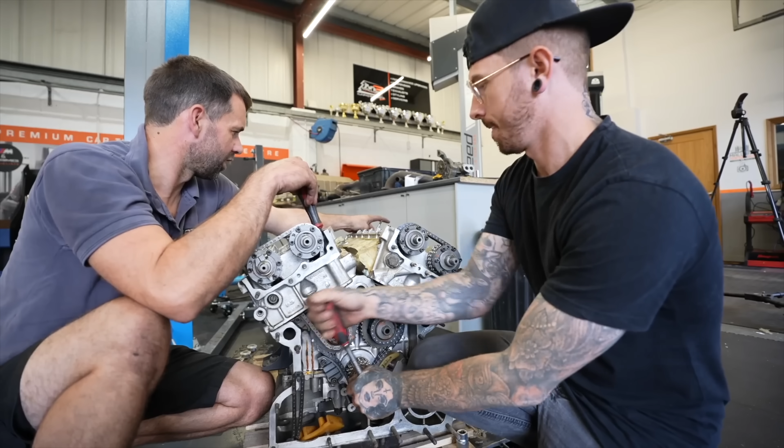£100,000 on this Lamborghini Murcielago, which was left abandoned for over 7 years. We've discovered along the way that the engine was rebuilt poorly - the bolts were literally finger tight. It was also hiding some painful bodywork underneath the wrap, and a bunch of other questionable repairs - there's literally holes here. But this is my absolute dream car, and whether it makes sense or not, I'm determined to rebuild this Lamborghini.

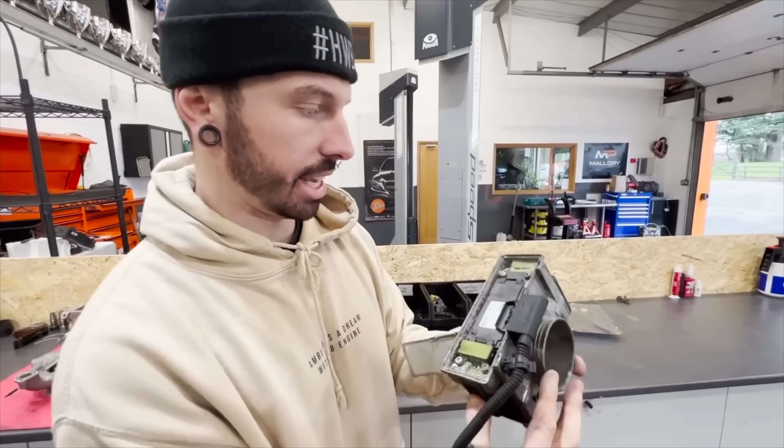And the fact my dad is helping me along the way makes this build that much more special.

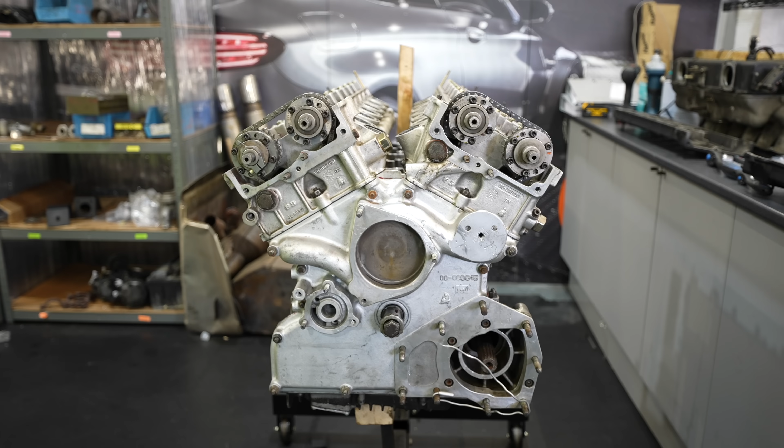But we're gonna need some help from Lamborghini, which is why I've come in today. Lamborghini actually agreed to our little deal, and what's in this box could save me thousands.

But for now, we've got an engine to deal with. Now that we timed up the engine in the last video, the computers of the car need to know that the engine's timed up, so they know when to inject fuel and when to ignite it. The way it does that is through a cam position sensor, and this pointer thing is what communicates with the cam position sensors, which are sat here.

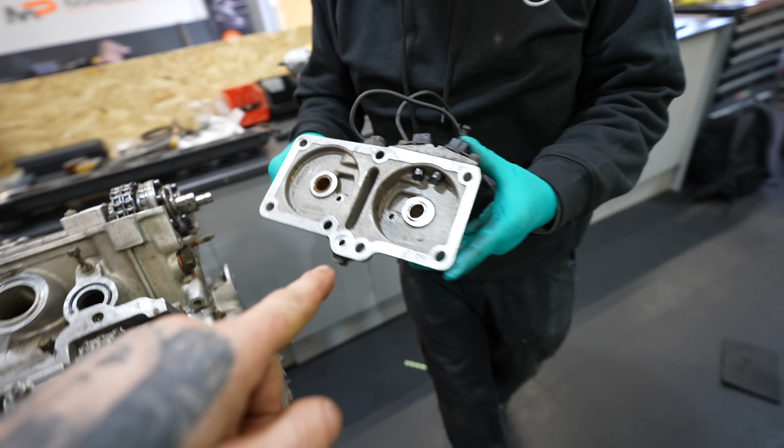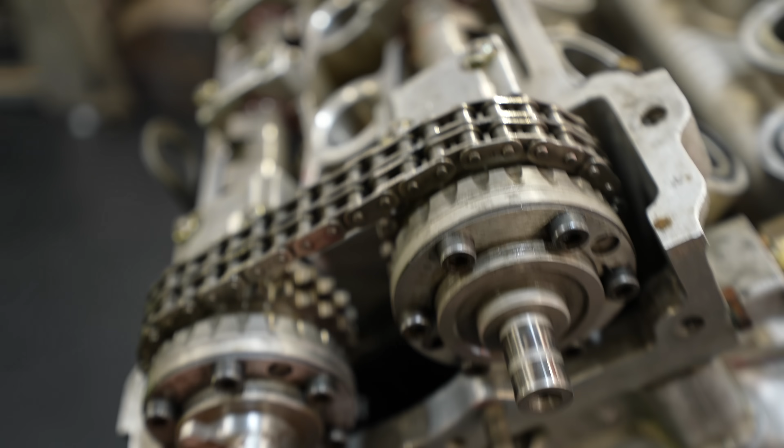According to the Murcielago repair manual, the pointer on the end of the cam needs to be pointing to that cam sensor when piston number 1 is 30 degrees before top dead center. So we're turning over the engine now to get it bang on 30 degrees before, then I can adjust that pointer into place and slide on the cam position sensor and see if it lines up. And it was, so that means we can tighten it all down.

Everything is all timed up, ready to go. All we need to do now is literally start bolting the whole thing together, and then we can figure out whether what we've done is actually right.

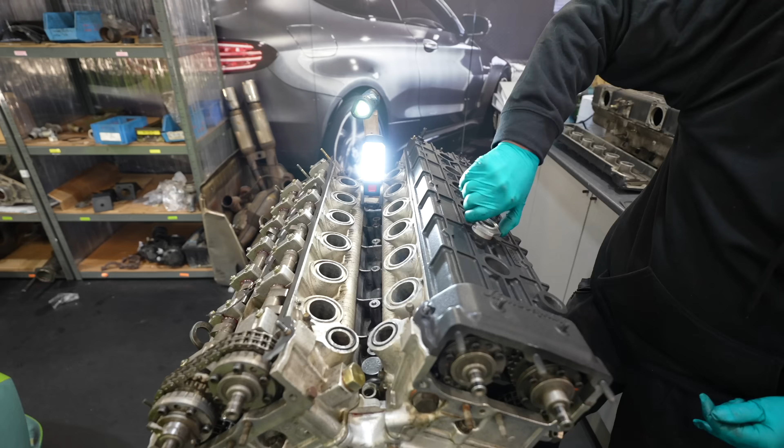We are actually sealing up the engine now. On go the rocker covers, both left hand and right hand side, along with the gaskets and the gaskets for the cam sensors as well.

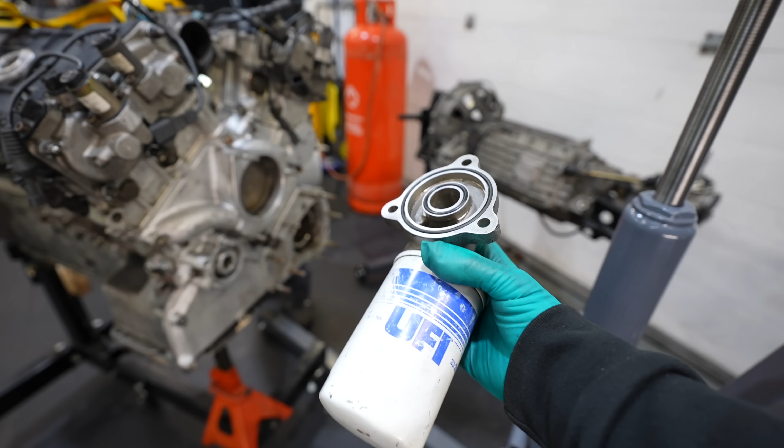And what I have in my hand now are some knock sensors. They bolt to the lower block of the engine and then send a signal to the ECU if any of the cylinders are knocking. So I've got to make sure I get these in the right place. Then I've got the oil filter and the oil filter housing to bolt onto it. Yes, I'm going to need a new oil filter, but we'll get to that.

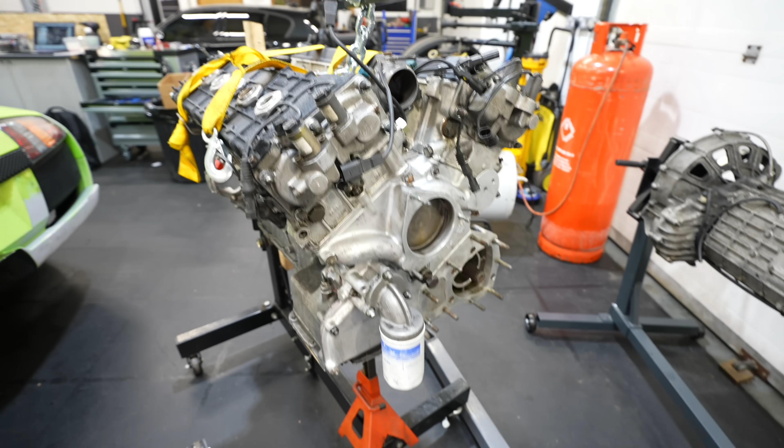And with that all on, we can finally take the engine off the engine stand and hang it with the engine hoist. Now we can access the main seal of the engine and replace that. And somewhere amongst the boxes of bits, I found a starter motor that we can bolt to the engine as well.

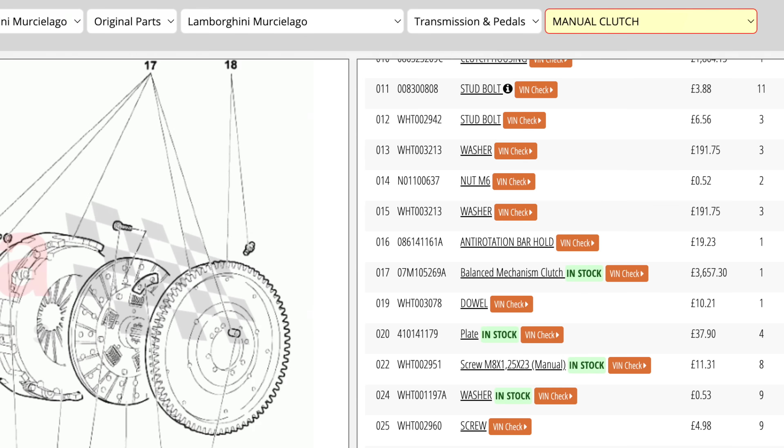Now, when we bought the car, it didn't come with a flywheel, but I've managed to get a reconditioned flywheel and Kevlar clutch all balanced up from a company called Reeve Knight. I think I'm pronouncing that right. £2,000 for the clutch flywheel, and it's an uprated one as well. And it came with all the bolts, so absolute legend.

This should go on like this. So this flywheel is actually brand new secondhand. It's been resurfaced, so it should be as good as new.

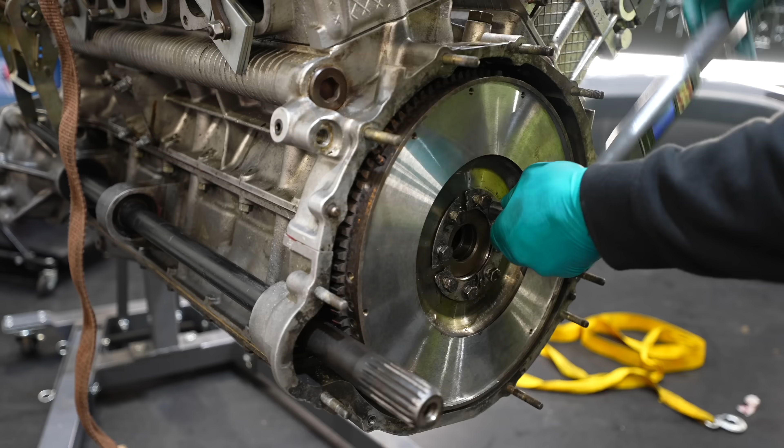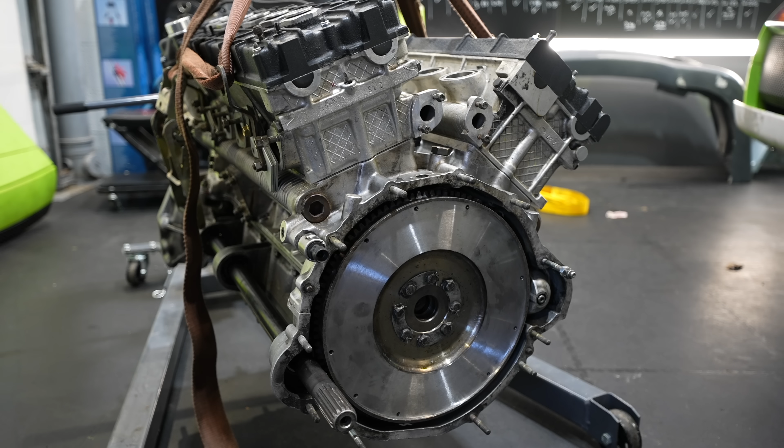There's some special plates which go on before the bolts, and then I've got to torque the bolts up in the procedure that it says in the manual. And once the bolts are torqued up, you're actually meant to knock over the plate which sits behind the bolts, which kind of clamps the bolt down and stops it from coming loose. But I can't imagine how well that works. And there it is. And there's one final thing we're missing.

We've got a new bearing from the bearing shop. My dad went to the bearing shop, £5 for a new bearing. Although from Lamborghini it was £15, so we saved a tenner at least. Oh, one fresh new bearing and the circlip installed. Oh, it's like going to the jewellers.

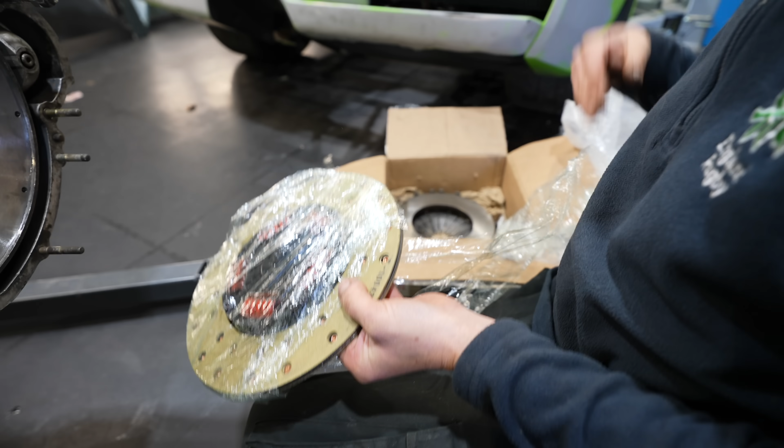£2,000 worth of clutch. Isn't it? It's good for 10 miles.

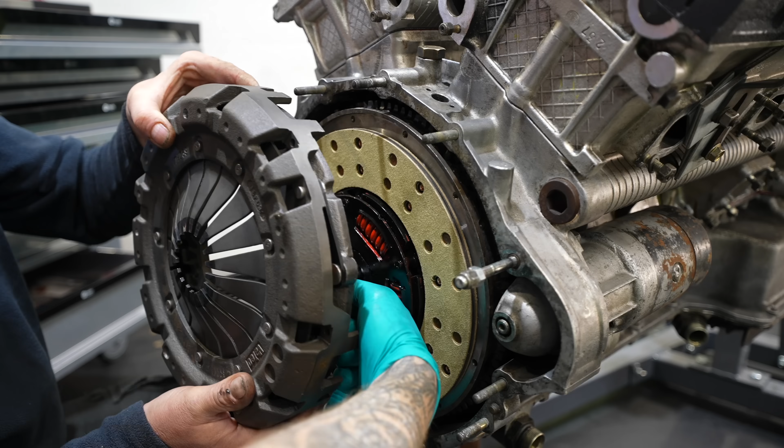This has all been balanced, so we are making sure now that the pressure plate lines up to the flywheel like that, so then we're not going to get any wobbles. Now you're actually supposed to use a special clutch alignment tool to make sure that the clutch sits perfectly in the center of the flywheel. But as we didn't have one, we managed to make one with an extension and a socket, as I'm sure a lot of you guys who have changed clutches before at home do the same thing.

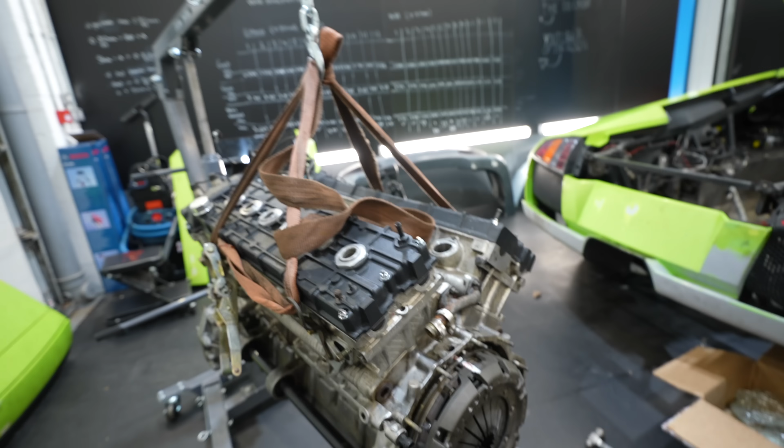Clutch and pressure plate is on, lined up, we think, and excitingly, the next step. The next step is we're going to take the manual gearbox off the stand, which actually we found out in a previous episode was an automatic gearbox, which is converted to a manual because it has an extra hole here, which we're going to have to fill up with something. And we're going to bolt it to it, and we will have like a complete engine and gearbox, which is pretty exciting. Yeah, I filled it up.

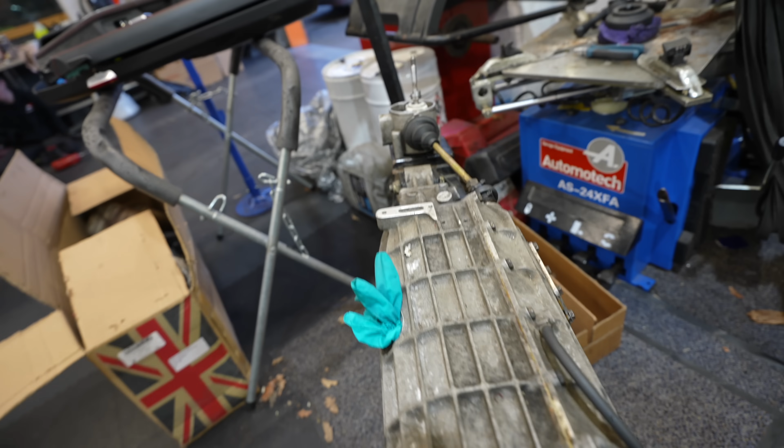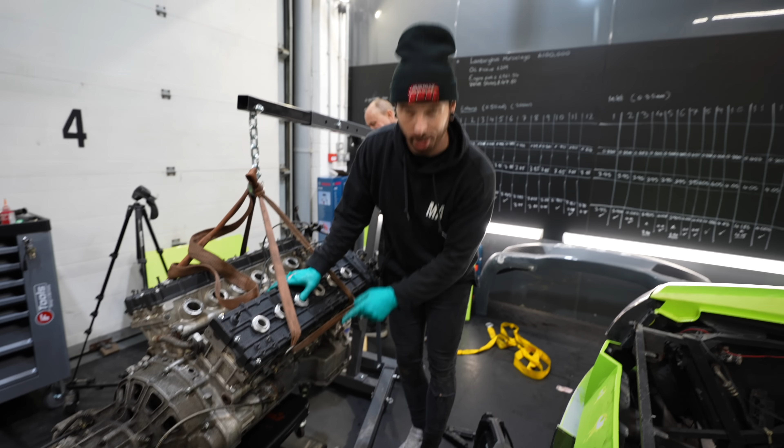Another monumental moment now. The gearbox being bolted to the engine of the car. Now that we've slid it into place, all we've got to do is tighten up all the bell housing bolts. And there was one thing I was dying to find out. One thing that we don't know, now this is all together, is whether the starter motor even works. And anything on this car looks like we've got to take the engine out to change. So I want to be 100% sure that starter motor works.

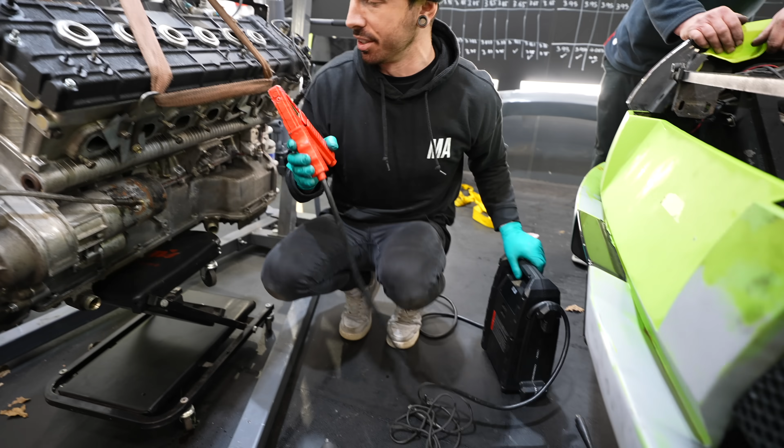So we've got a jumper pack and a load of other goodies, which we're going to put onto the starter motor, and then we're going to ground it out over here. This is a little switch. One of these is going to go on the positive, negative for the switch. Turn this on. It's in neutral. It's not going to try and drive. Okay, now this should turn the whole engine over. You've not got an earth on it. No. Right, yeah, that's right.

That's good. Hey! It's okay, we've got assembly lube in it, so the starter motor does work, if you can listen. Too much rock. At least the starter motor works though, and the engine does turn over. There's no valves hitting pistons though, is there? No. So we're good. And that worked. Science. Things are looking good and we're making some really good progress already.

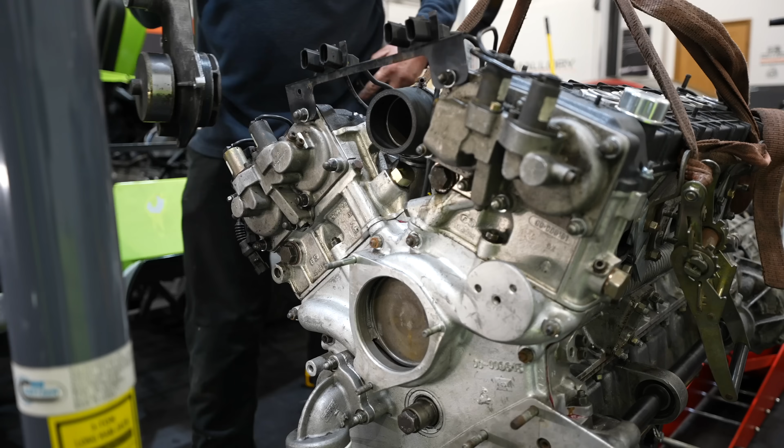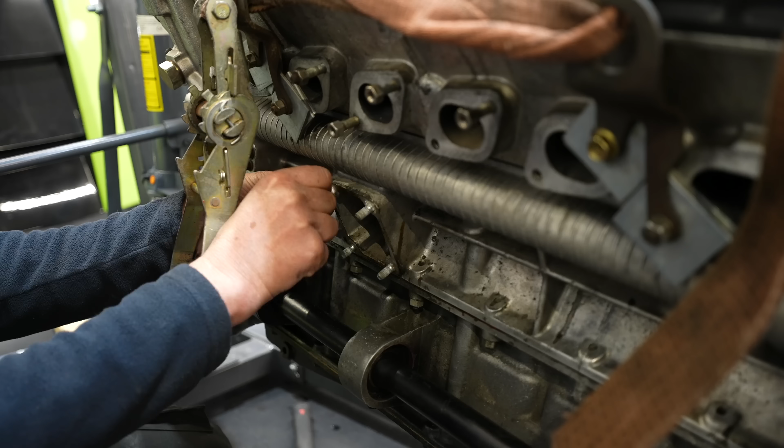Now it's time to start bolting on all the ancillaries of the car, like the water pump and the thermostat housing, which I'm doing now, and then both the engine mounts, left hand and right hand side of the car. And I'd say we're doing pretty well for people that have never built a Lamborghini engine before. This huge clump of metal here is the power steering pump and the aircon compressor as well. Yes, a 2002 Lamborghini does have aircon. And then one final tensioner which bolts on here.

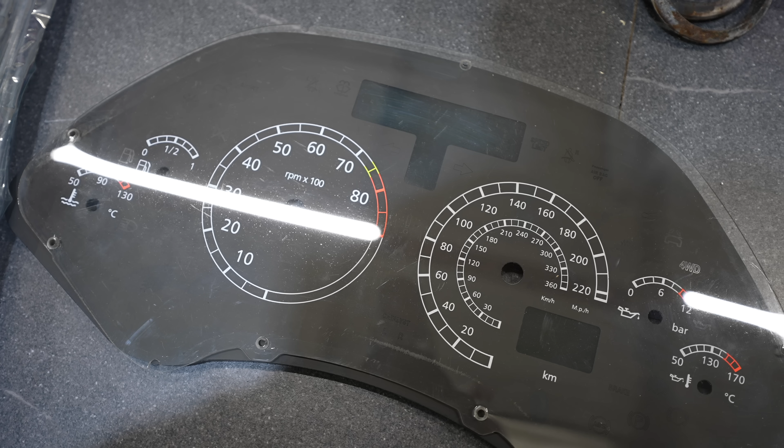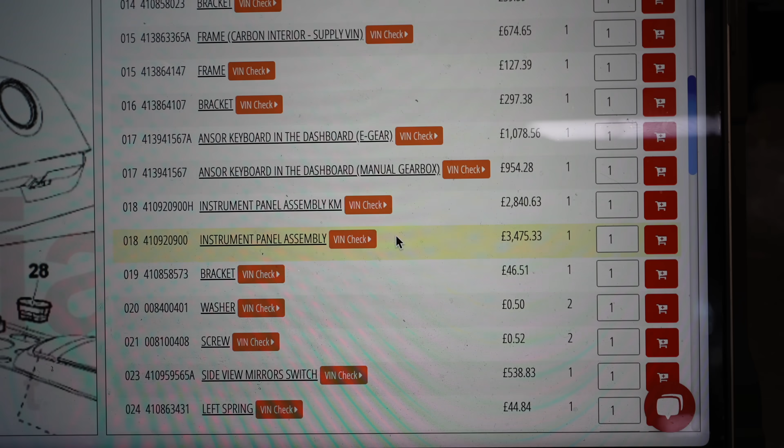Now let me tell you about this deal that we made with Lamborghini at the start of the video. Ever since I picked up the car, the instrument cluster hasn't worked. And apparently that's because the previous owners managed to jump the car the wrong way. Now, a brand new instrument cluster from Lamborghini would cost me over £3,400, including tax. So I really wanted to avoid buying one. Also, you may remember we ordered a brand new oil pump from Lamborghini because we weren't confident in the way that the old one had been rebuilt. But after ordering it, the wait got longer and longer. And in the end, we ended up rebuilding the one that we had.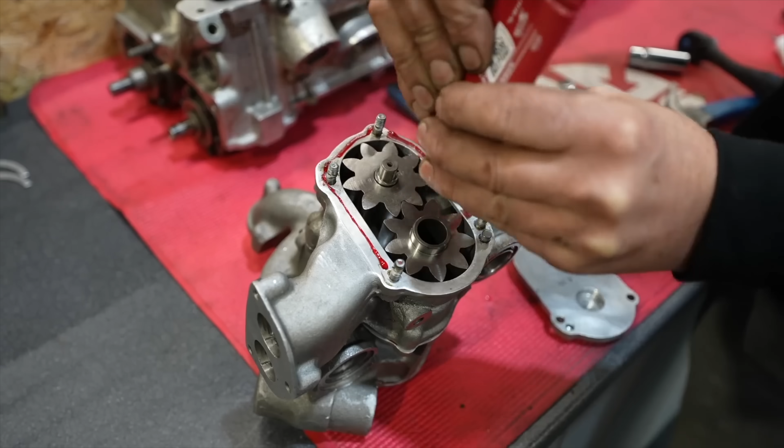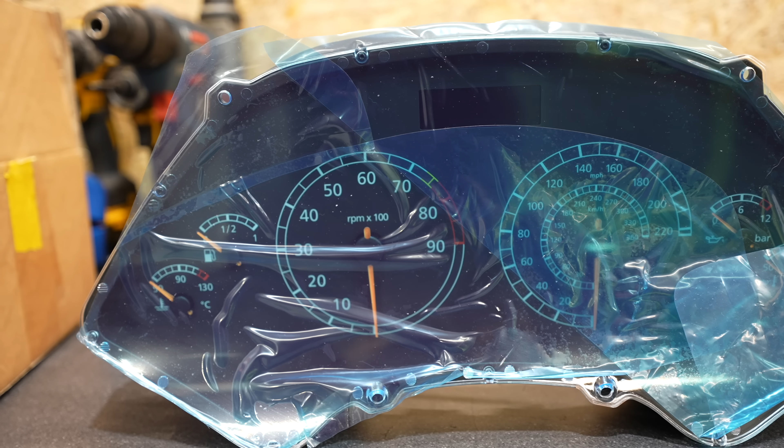So I had a deal proposal with Lamborghini to cancel my oil pump order and transfer the money that I used to pay for that onto a new instrument cluster. Now normally they wouldn't accept this because it's a special order part, but on this occasion they did. And inside this box, finally, we have a brand new instrument cluster, after all the hassle we've had with the old one. But unfortunately, it's not as simple as that.

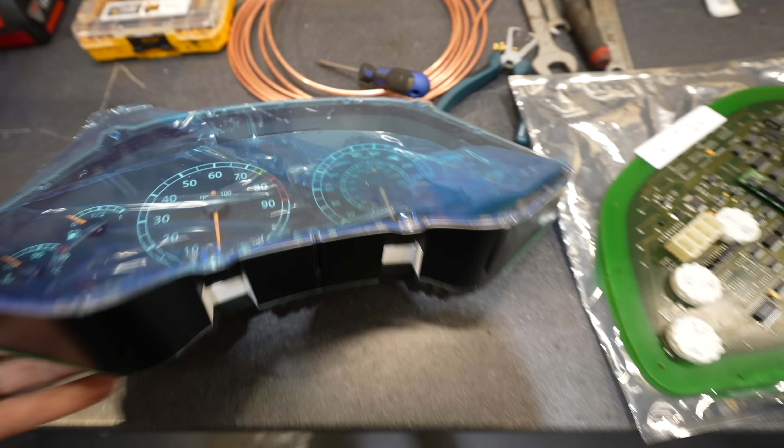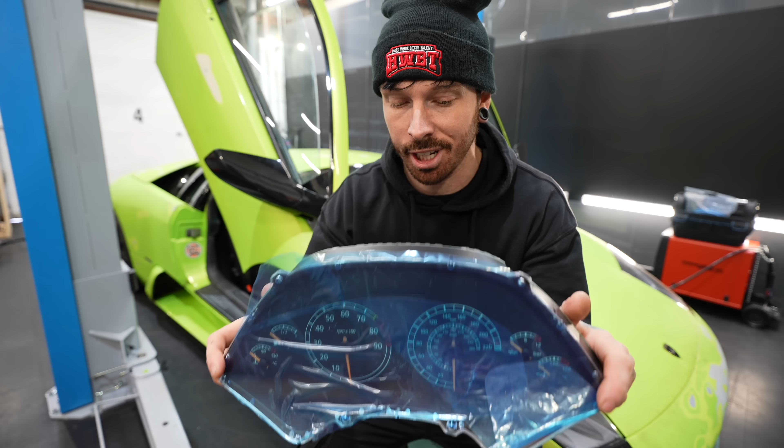As soon as I got back, I unboxed this instrument cluster to find that on the back, the plug, the connector in here is completely different to the plug and connector that is on my instrument cluster. Now I've double and triple checked the wiring behind my dashboard to see if anybody has messed with the plugs or changed the connector to a different one, but it all looks legit. These connectors at the bottom here look almost too good to be anything else but Lamborghini, and this plug is definitely all original. And Lamborghini were 100% positive that they've sent me the right cluster. They matched it off my VIN number. So what the hell was going on? Well, I then found out this.

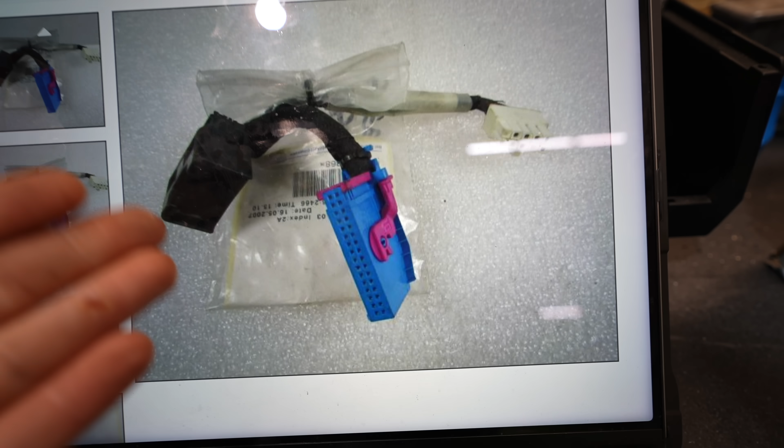If you check these clocks out, they read in miles per hour, but my old clocks actually read in kilometers per hour. It turns out all 2002 Lamborghini Murcielagos were only made with clocks reading in kilometers per hour, and all models after 2002 came with a completely different wiring harness behind the dashboard. The instrument cluster with the plug I need is discontinued. So if you had a 2002 Murcielago and wanted your cluster to read in miles per hour, you'd have to buy this wiring harness, which converts it from that plug into the blue plug on the back of all the instrument clusters from now on.

Let me show you how much they want for that instrument cluster: £1,666.40 plus VAT. So if I want this instrument cluster to work, I'm in well over, what, like £6,000. So I still don't know what to do - we've got to get the old ones working.

On top of that, when we finally get the instrument cluster working, we still have no idea what the mileage of this car would be. The only way I can roughly find out is by checking it using carVertical. This is the report I've got for the Lamborghini Murcielago. Everything looks good throughout, and when you get to the mileage graph, the last recorded mileage was around 78,000 miles in 2009. So I'd say we're expecting around 80,000 miles, fingers crossed.

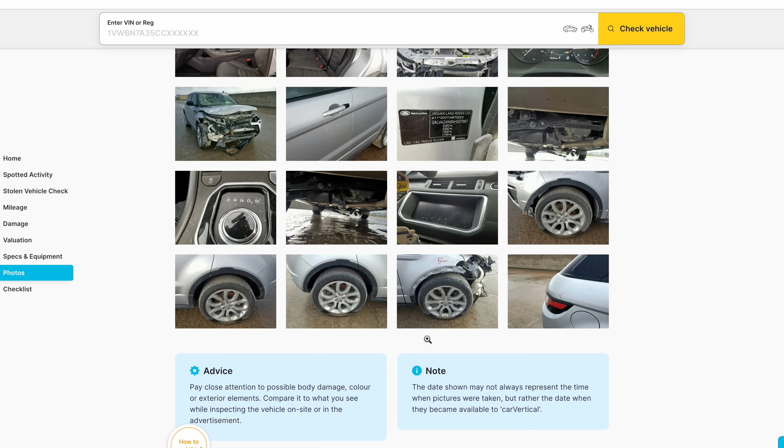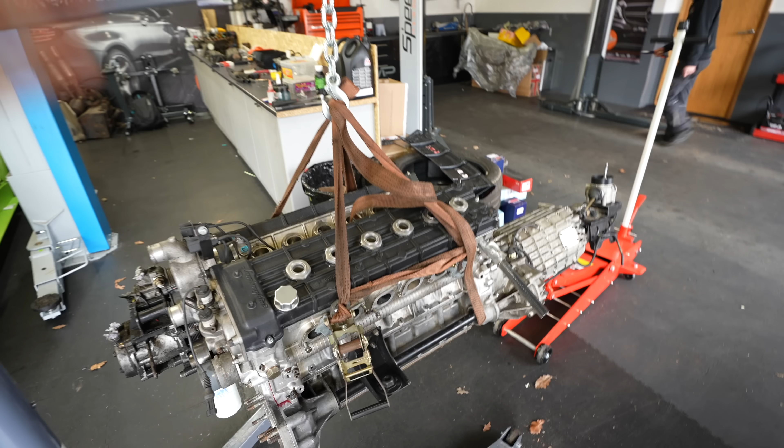The engine and the gearbox are absolutely huge, and all of this has got to go in as is, because it's so difficult to work around. Even though it's a huge engine bay, once it's in, I'm sure it's going to be completely tight and compact. We've got to get the exhaust manifold on before we put the engine in, because the side of the engine wall is going to be so difficult to slide anything onto once the engine is in.

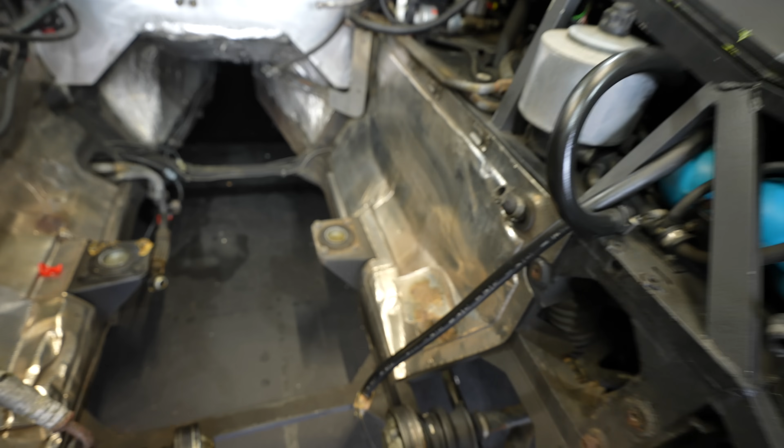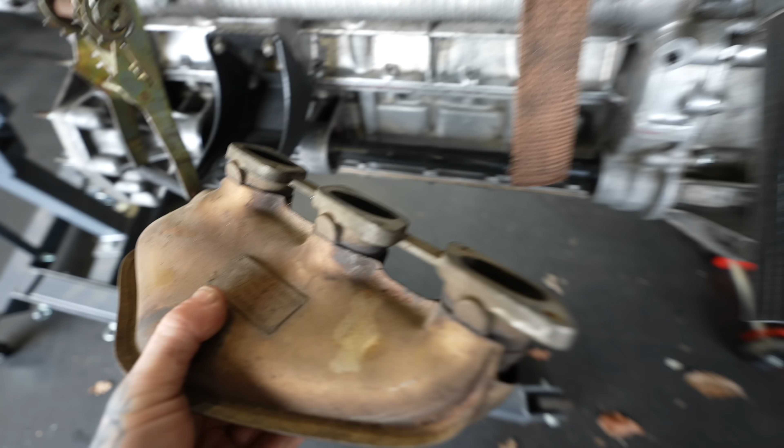The exhaust manifold - well, one of them is over here, and this one's going to go on the other side. But between the exhaust manifold and the block of the engine, there are 12 of these gaskets, one for each cylinder, and we only have one.

I've just called Lamborghini - they want £333 for 12 of these gaskets, and they're just little metal materials. They can get them tomorrow, but we want to put the engine in today. So the only solution we have is to send Fabian to an exhaust place to get a bit of sheet metal, which we should be able to make these exhaust gaskets from. Easy. Go, Fabian.

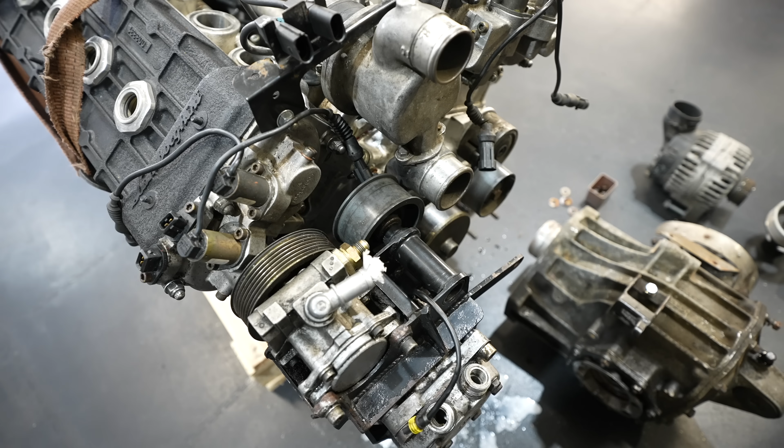Whilst we wait for Fabian to collect and deliver the goods, we've got plenty more we can carry on with. One of them being the rear diff - this attaches directly to the engine, and we're pretty sure we should bolt this on before we put it in the car. After that, to drive all the ancillaries, we're going to need an ancillary belt.

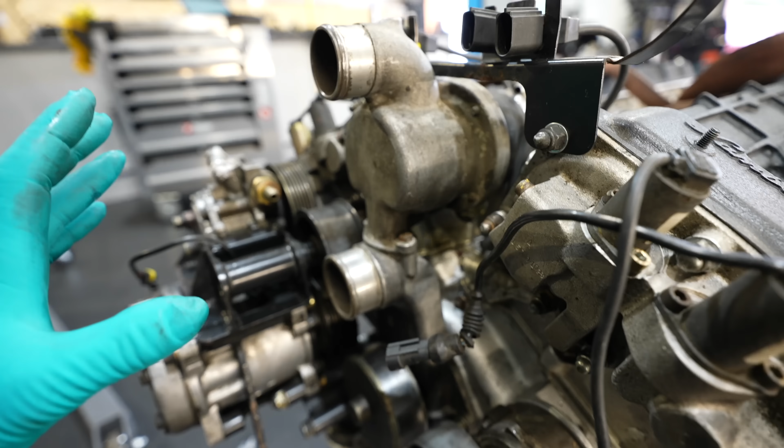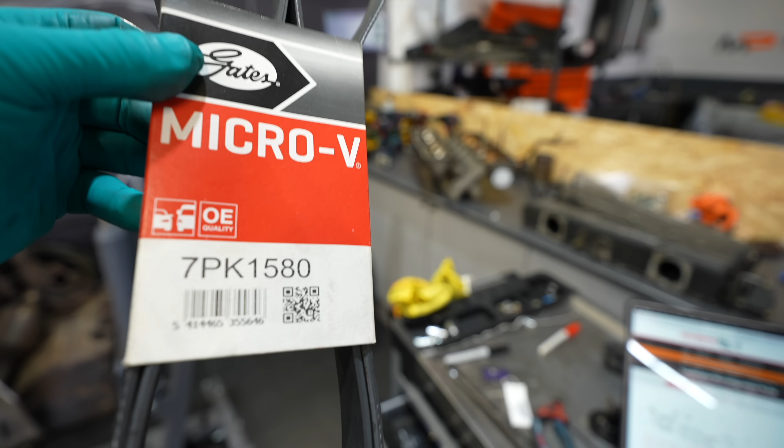Lamborghini want £90 and 8 pence plus VAT for an auxiliary belt. And you can already guess we found one for a lot cheaper on eBay - £13.49. We just gotta hope it works.

And the belt fits snug - come on. And quite positively, it did. It was pretty easy to cross-reference the auxiliary belts - we just needed to find out the length of the original belt and how many ribs it had in it. Once we put the alternator on and tightened the tensioner up, the belt was on and the engine was just about ready.

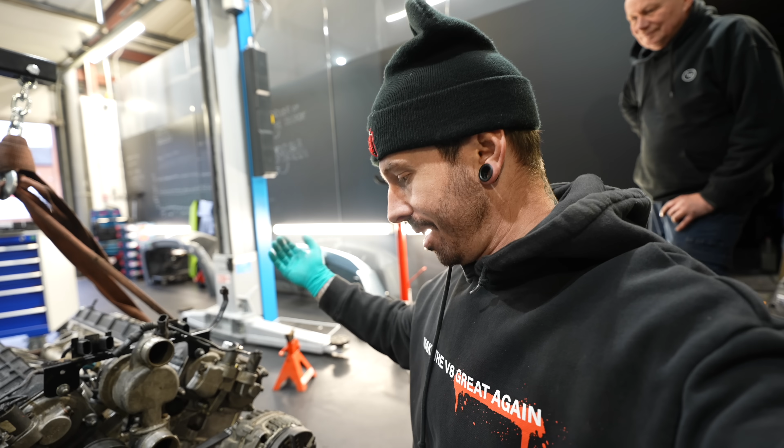Right, now everything is all on, and we've got some decision to make. My dad reckons that it would probably go in the engine bay a lot better without the inlet manifold on, but I think it's going to be easier to get it on now. Well, we'll see. I think let's put the inlet manifold on, and then I think we're just about ready to go, bar the exhaust manifold gaskets.

And this was the inlet manifold. This is what's came off, and quite clearly, before this engine was taken apart, you can obviously see it wasn't so healthy. I mean, this side of the inlet looks like an oil sump, and there's a lot of oil stains in there, and there definitely shouldn't be any oil inside an inlet manifold. So this car would have been smoking like hell. Either way, we're going to clean it up. I'll put these on top, and then we've got these to deal with.

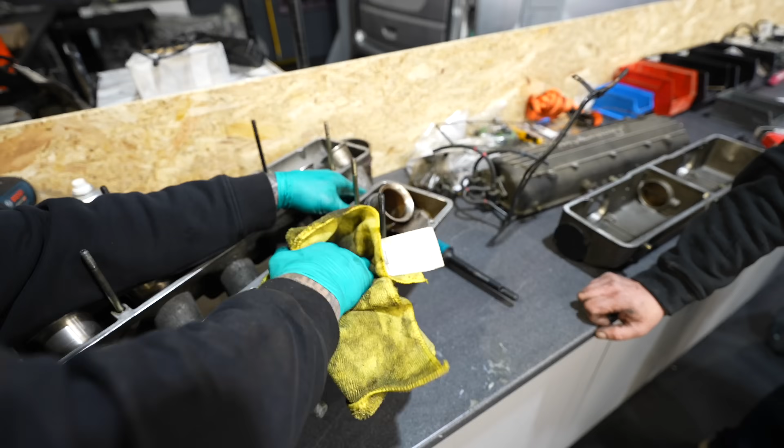I'm going to clean the inlet manifold up with a bit of degreaser and hopefully get rid of most of that oil staining, which definitely shouldn't be in there. Once I've done that, there's some more gaskets to go on, and then the rest of the components before I can put on both the covers of each bank of the inlet manifold.

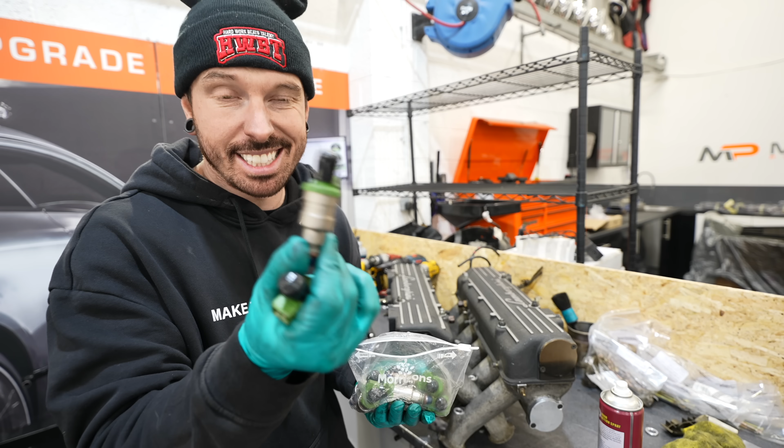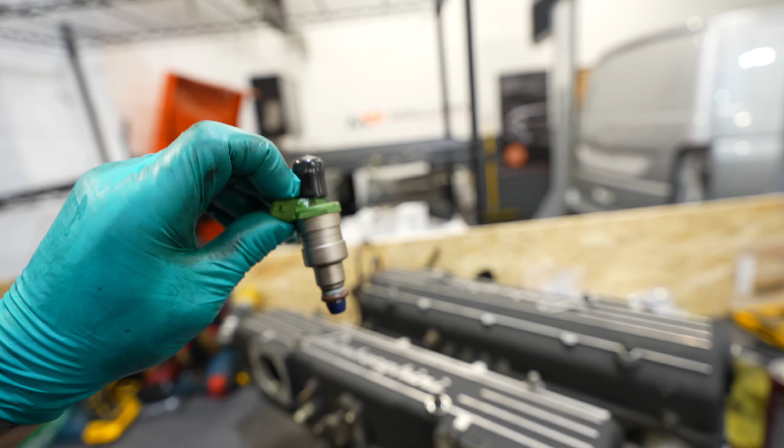The next thing to go in on the inlet manifold are the injectors. We've got all the old ones here. Well, they're Bosch ones, and they're like 30 to 40 pound an injector, which really isn't too bad, but when there's 12 of them, it's pretty bad. Instead, I sent these off to Artec to have them cleaned out, new seals put on them, and all the pattern tested. They've got a pretty cool machine inside Artec which tests the injectors.

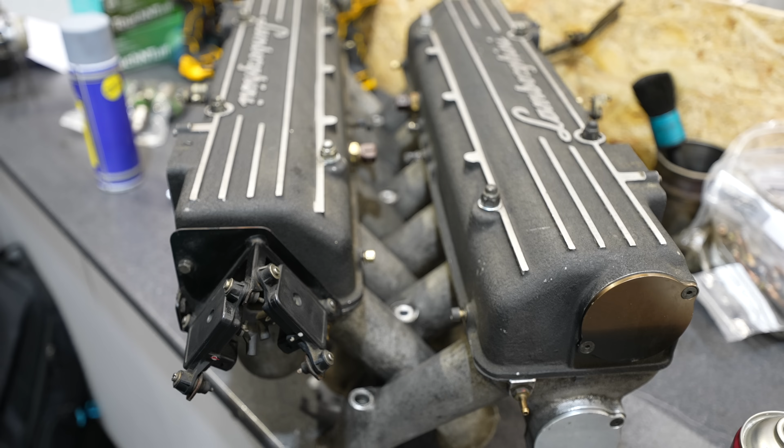Now I'm attaching them to the fuel rail, which they just push into place, and then they're held on with a little sliding clip. Then I'm going to push them into the inlet manifold. This is the same for both sides. And to add even more to that, there's some more weird vacuum lines which sit on the inlet manifold both sides, which open another sort of butterfly flap inside the inlet manifold. Maybe one of you guys in the comments can tell me what exactly this part does, but I wasn't too sure.

Okay, looking good. The next thing to go on are the throttle bodies, each side, which open and close to let the air in the engine. And if you remember in the last video, I told you they were the same throttle bodies that are used on a Volvo. This is a Murcielago throttle body, and this is a Volvo throttle body. They are literally exactly the same. But unfortunately, there are a few issues which are going to stop us from sending these Lamborghini ones back and using the Volvo ones, and it's something to do with the coding on the car.

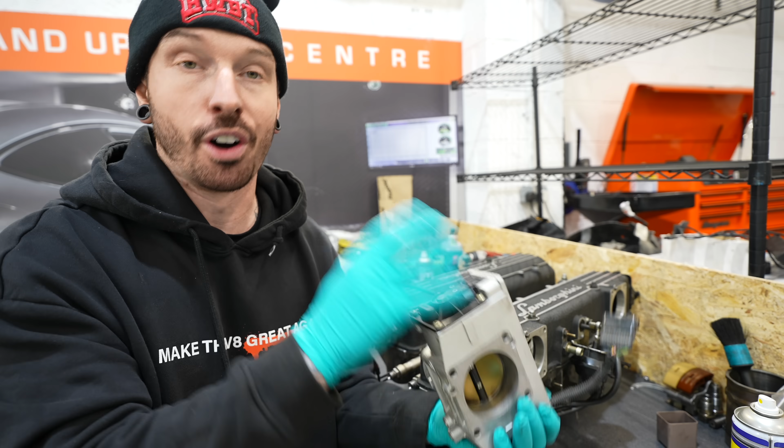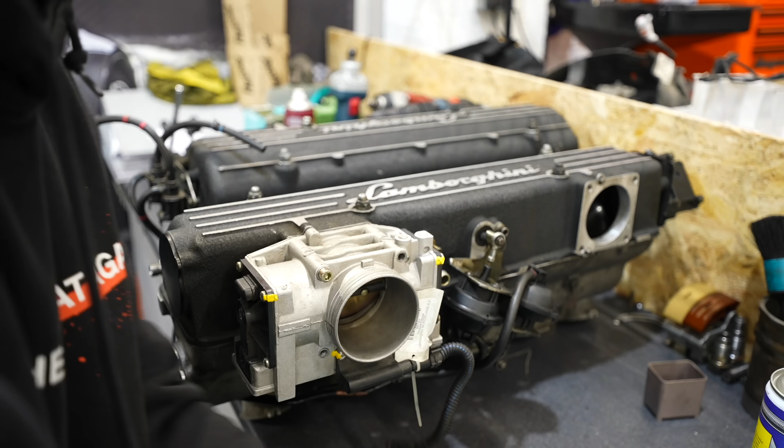Even though the car's a 2002 Murcielago, it still requires throttle bodies to be coded to the car if they're different. And obviously Volvo ones are going to be different. They've got a different amount of wires going into the plug, so maybe we could have got the Volvo ones working if we knew what we were doing, but the issue is we don't. And I've already spent the money now, I've committed to it. These throttle bodies are going on. And I definitely think we've cheated Lamborghini out of enough money so far. It's just annoying we couldn't save that little bit extra on these throttle bodies.

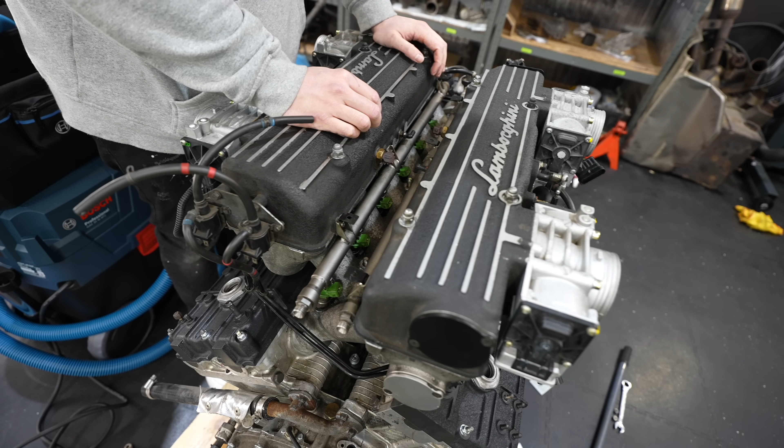But now we have just hit monumental moment number 2. The engine, the gearbox, the rear diff, and the inlet manifold are all bolted together for the first time in 7 years. And to complement that, we're now adding the wiring loom which connects to all the injectors and everything around the inlet manifold to make life a little bit easier when we put the engine into the car.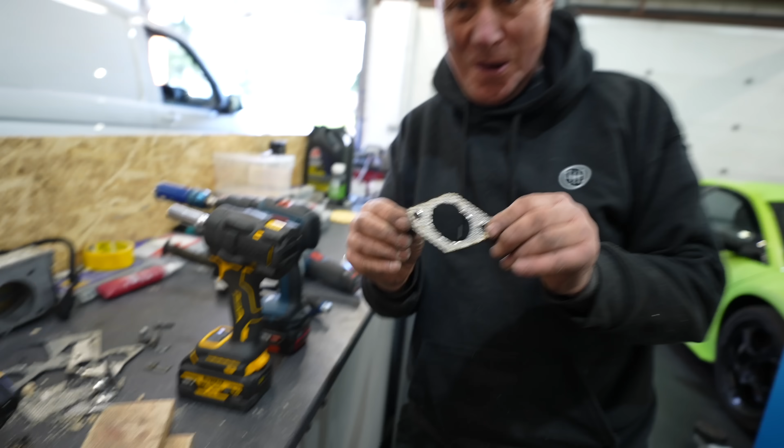Here's some that he's done earlier, questionable, but... There we go. Perfect.

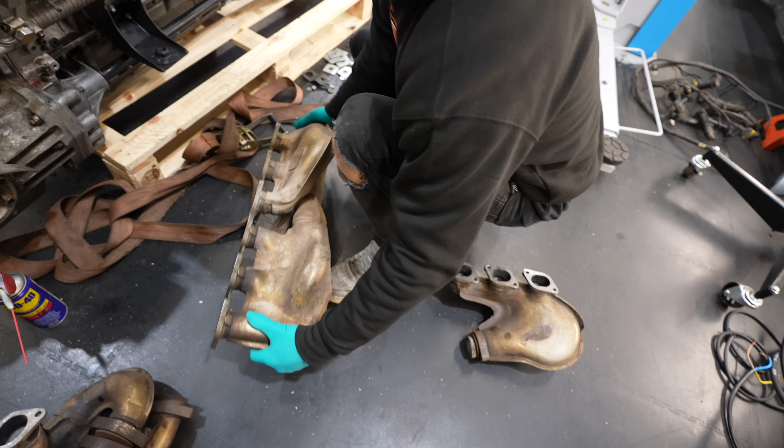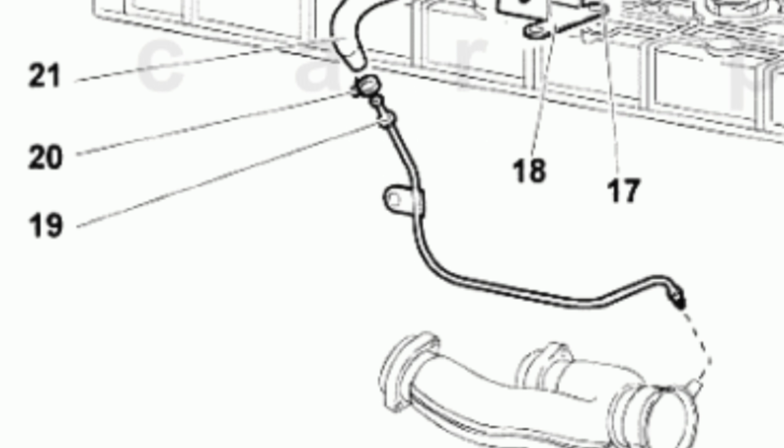This sensor here is actually for a manifold pressure sensor. So that plugs in there, and then this hose off it, the manifold bolts onto that, like there, and then there's a line which connects into the exhaust manifold here, which we don't have. And from the looks of it, it looks like it's going to be a brake line. And actually looking at the diagram for this, it does look like just a copper line.

And I've got some copper line laying around which I've used for some brakes before. So I'm now going to have a go at making my own exhaust manifold pressure line for a Lamborghini Murcielago. The tool I'm using now sort of flares the brake line out as it would do on a normal brake line. And you can see that here. And that should screw into the exhaust manifolds.

I'm pretty sure the idea of these sensors is to detect the pressure between the manifold and the catalytic converters. If the cats were blocked, then there'd be more pressure, which would bring up a fault. And sure enough, it seems to be doing the job, but I guess we won't find out if it actually works properly until we get the engine running.

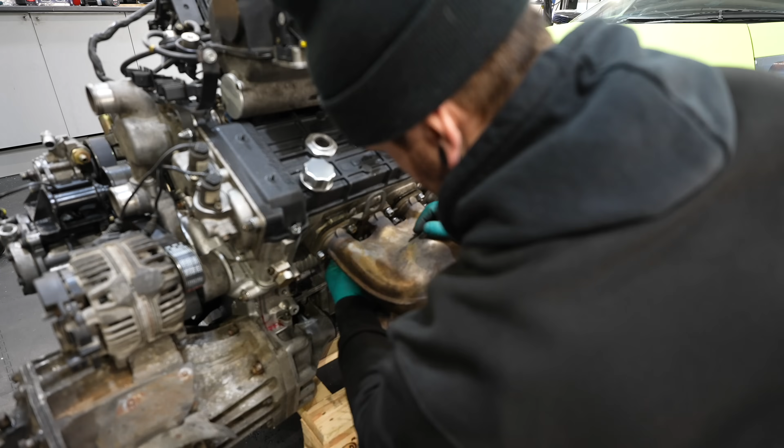And I'm so glad we're putting the exhaust manifold on now and not when it's in the car, because it was even difficult and such a tedious, long job to do whilst it was out the car. You can only get half a turn on the spanner at a time. Boring, annoying, boring.

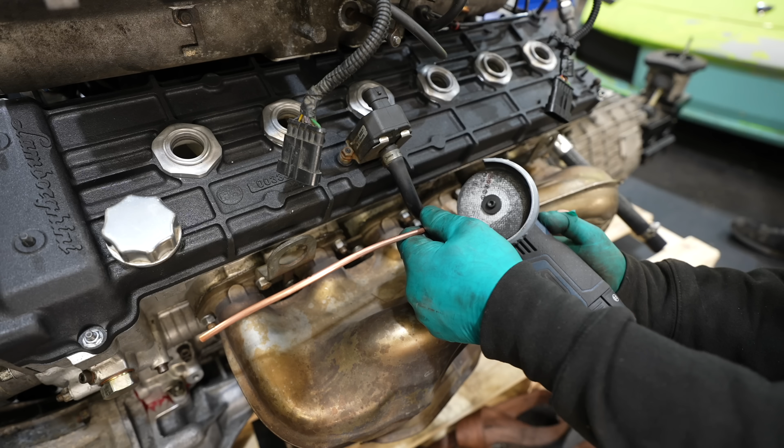Bored. After I'd finally tightened up all the bolts for the manifold, I can then trim down my new manifold pressure line which I'd made. I'm not sure that's the proper way to do it, but it worked. After that, it just slides in the silicone hose which connects to the sensor, and we're just about ready to go. And looking back on it now, Lamborghini would have charged £50 for the right hand side pipe and £188.20 for the left hand pipe. So I've made quite a saving there.

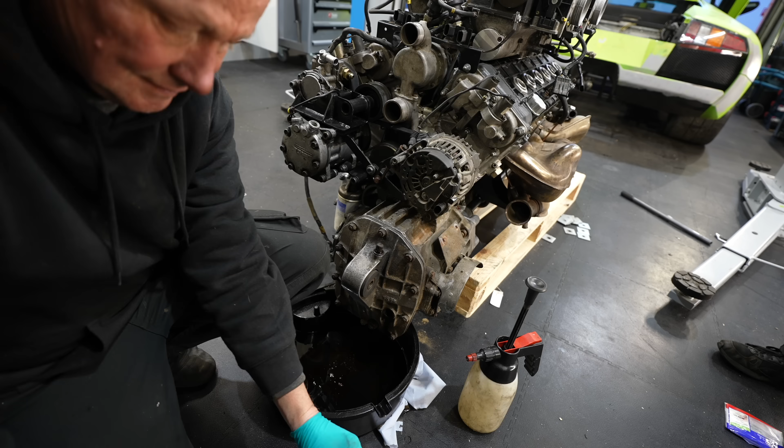That's if it works. One thing I want to do before we put the engine in is drain the rear diff oil, as I imagine it's not been changed in such a long time, and fill it up with some fresh 75W90. There's two plugs on the rear diff, one being a drain plug and one being the fill plug. And all you do to fill it is just keep putting the 75W90 in until it starts coming back out the fill plug. And it's exactly the same for the gearbox, apart from the gearbox takes a lot more oil than the rear diff.

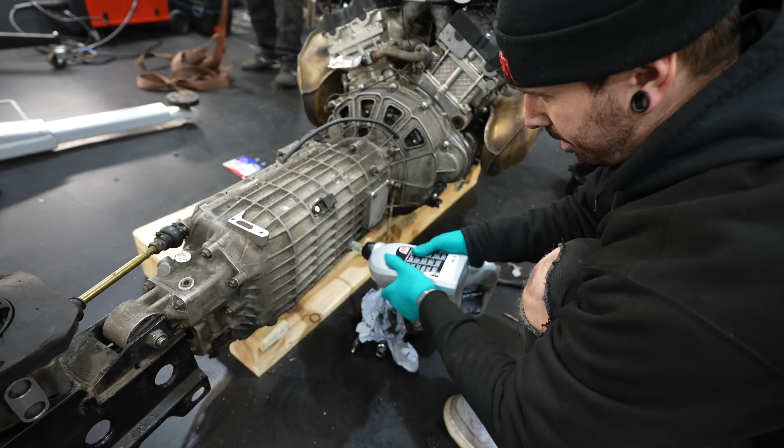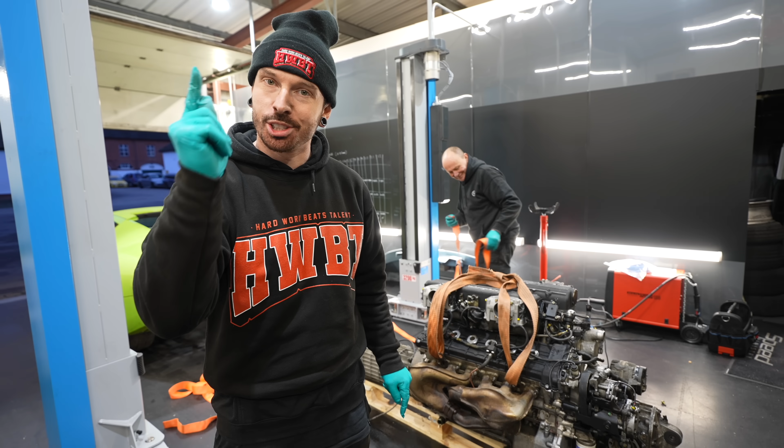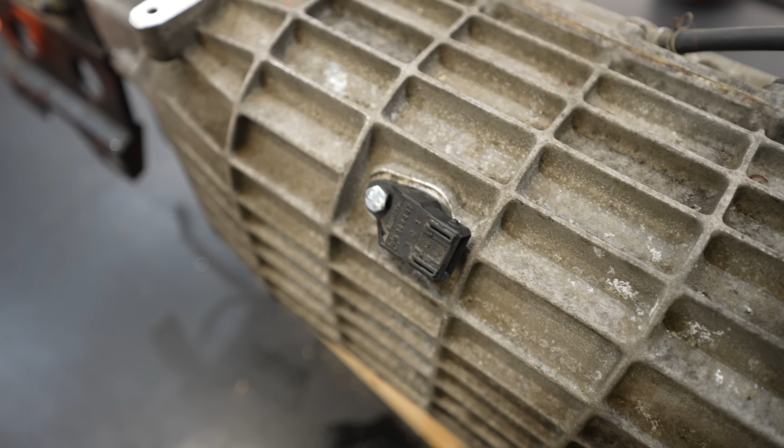This is it. The moment we've been waiting for since picking up this engine and rebuilding it. Putting it in the car. It's going to be one small lift for man and one giant leap for mankind. Welcome to monumental moment number 3. The V12 Murcielago engine is about to be one with the car again after 7 years of being apart. Rebuilt by Armstrong and Son, with no experience with Lamborghini engines before. I really hope that this is gonna work.

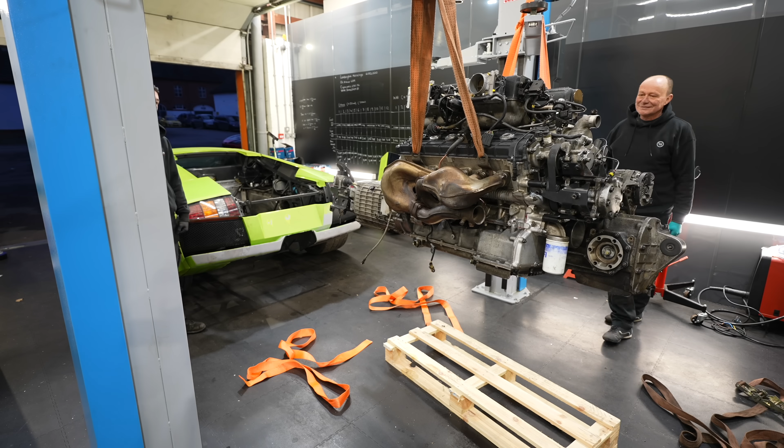Because of the size of the engine and the gearbox, we have to put this in a really strange way. We're lifting it up with the 2-post ramp and then pulling the car towards the engine. After that, the gearbox has to slide down the transmission tunnel, which means that we have to angle the engine at such a strange angle. And then together, we're going to slowly guide it into place to sit on the 2 lower engine mounts.

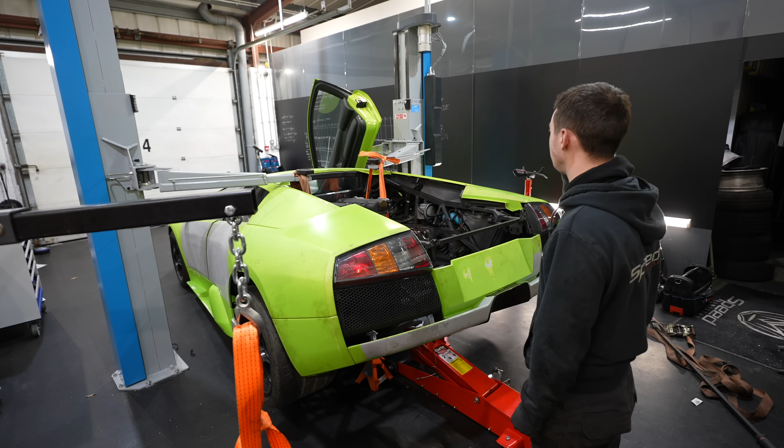So close to getting the engine mounts in. So close. We just need a spacer on top of them. I think that's what Lamborghini do. Then we can get the bolt through. Yes! Yes! Oh my god, it's in. What a car. The engine is in the Lamborghini Murcielago. Come on. One milestone here.